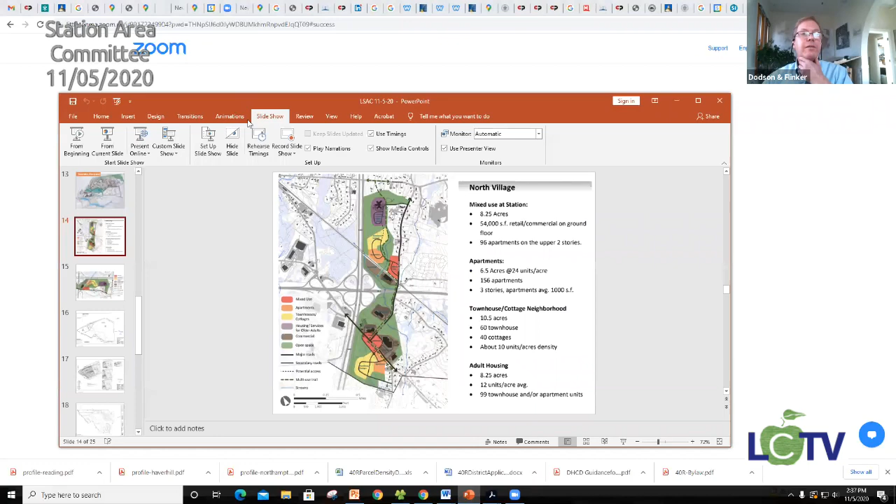Right. We haven't scoped it all out in that much detail, but I'll talk about it in kind of an outline. So I'm going to share my screen and turn on this PowerPoint. Can you all see that? Yep.

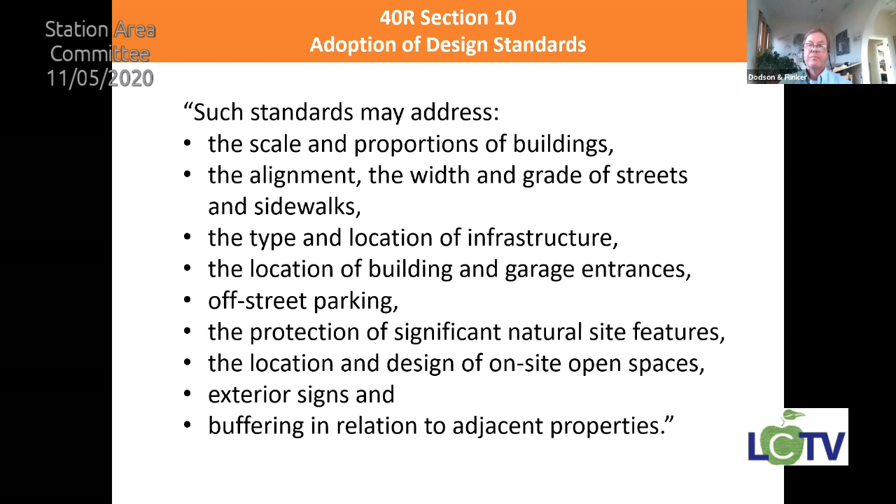So this will be an interesting test when we get the design guidelines written up as to what's the character that we're after. Because as we discussed earlier during the master plan process, there's kind of an essential conflict between what developers can afford to build and what the market will support, and certainly the colonial or historic tradition of towns like Littleton, right? You didn't traditionally have a 60 by 150-foot apartment building or a 300-foot long apartment building.

But that's the kind of development which a developer is probably going to need to put in to make this economically viable. So the question is, how do you make that something that has the character of Littleton or other towns in the region? Is it enough to just put a colonial facade on a 300-foot long building? Do we need to make that building look like 20 smaller buildings by breaking up the facade? So that's a lot of what we'll be, I think, wrestling with.

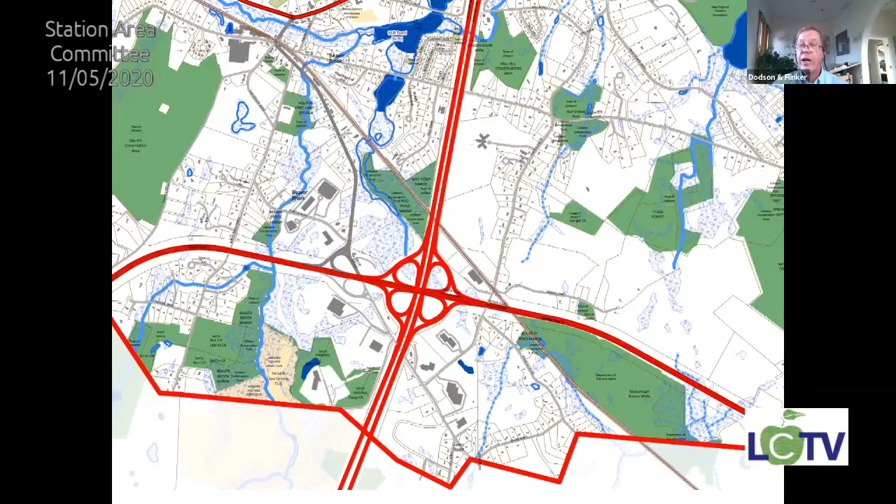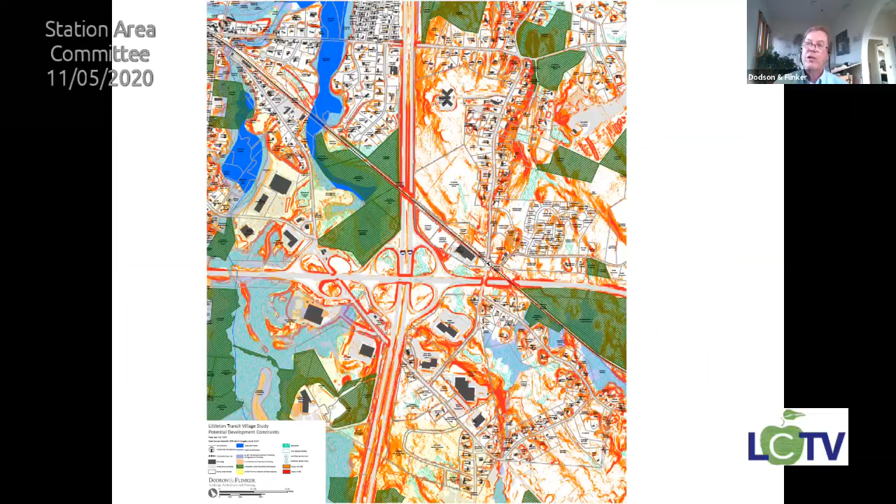So here's our site. I wanted to sort of back up, partly for my own reasons, and look at where we ended up with the previous master plan. As you know, we were looking at a site that extended all the way down to Taylor Street. Right now we're focusing on the areas north of the train station. As you recall, we discovered there are quite a few constraints between the arrangement of streets and the awkward intersection of the highways and the train and Foster Street and the sloping site and the steep slopes, all of which sort of led to this.

Now, this was a quick sketch plan that we did to illustrate the way different uses could be combined on the site to try to create more of a walkable village feeling. So as you recall, we have mixed-use buildings near the train station, trying to preserve and extend as much of the parking as we can for commuters, and then a road which crosses the wetland, and then the densest parts of the development closest to the station.

So we had a collection of apartments, and then the road continuing through and becoming a little less dense with cottages and townhouses, continuing over to townhouses by the Nashoba Life Care facility, and then connecting to their entrance road to create a second means of access.

So this plan was done quickly, but one reason to do this plan is to put some of those design goals in place. And even though it's pretty sketchy, it does illustrate a lot of the things which we'd want to see in the project.

So if we have new mixed-use commercial buildings, we'd want to have those as close as possible, or at least on the street side with the parking behind them, right near the train station. So you've got a sense of arriving at a real sort of village center. Instead of looking at a giant parking lot, you're looking at interesting buildings, you're seeing what's going on. It's more inviting, it's more attractive, and the parking is screened in the back.

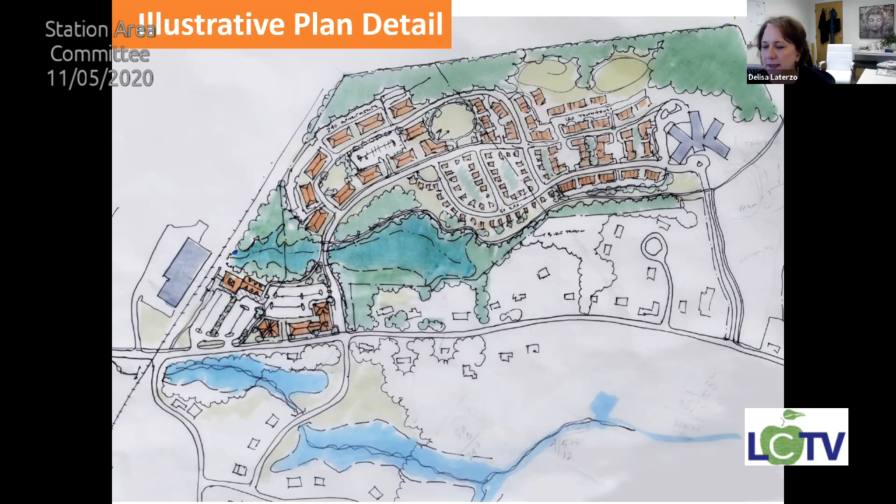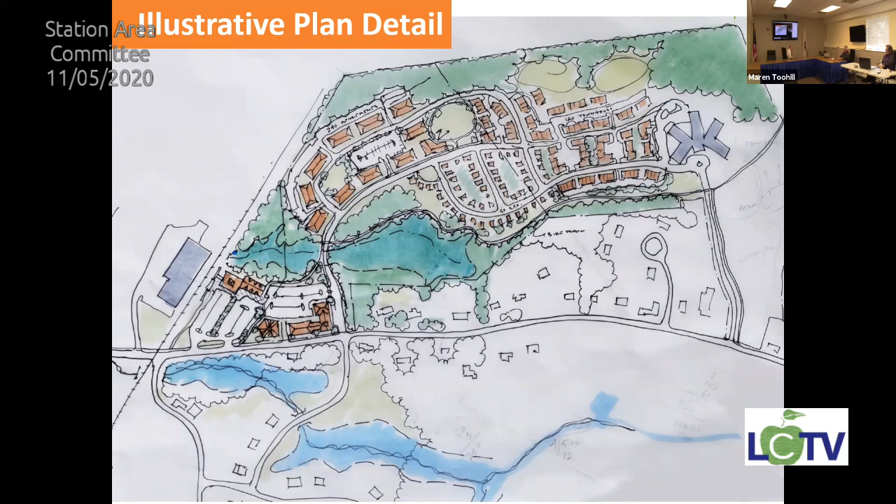Right. So that's still the approach we're taking, which brings up, I see that Joe Layton has joined us. Have we heard anything back from the Life Care Center? No, we haven't. So that's one of the things we still need to make sure of, that there's that corporate connection, to see their willingness to play ball. I think one of the things is what they're looking to maintain on the property, and then what they may view as in their interest to develop on their property. I'm just looking at the plan that's on the screen.

Right, but I guess, Joe, have you followed up with them again? Yes, that's one of the fun things with corporate, at least in my experience: you get to the person, you leave a message, and then you end up calling them back again. Yep, we got your message. And I need to try to get an actual mailing address to send some sort of more formal letter.

I'm sorry to keep interrupting here, but you had been given the name of somebody. So has a call been made to that person? I'm sorry, can you repeat that? She's asking if you have called the person. Correct. Yes. I just haven't gotten a call back. Okay, but have you called that person again? I've called them twice. Okay. So your thought is next to send a letter?

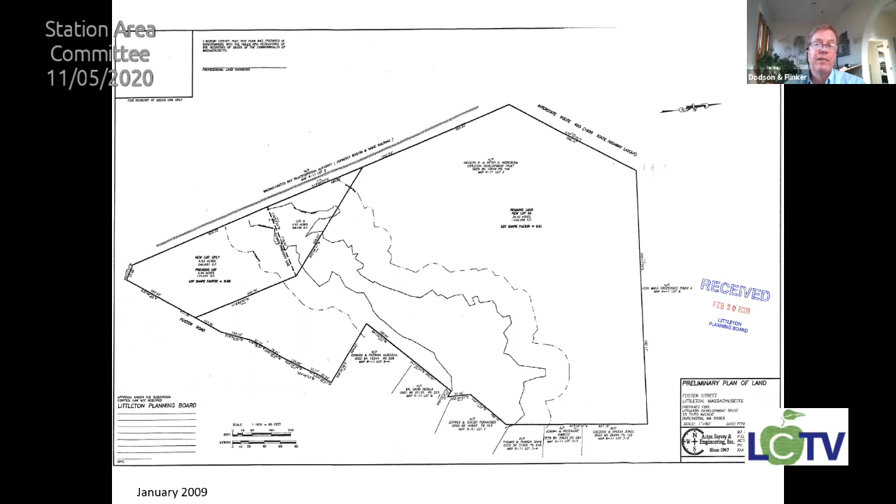Well, actually, some of the development proposals that the previous owner and the current owner came through actually show something pretty similar, so we can look at those. This was the base survey of the property from 2009. And it shows the wetlands that were surveyed at that point. So we're crossing diagonally across the site. And that dashed line is the wetland, I guess the 100-foot setback. Yeah.

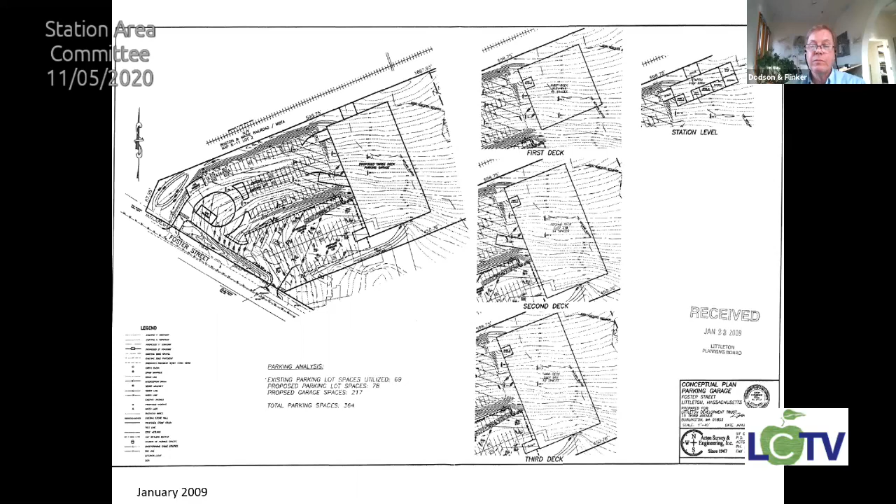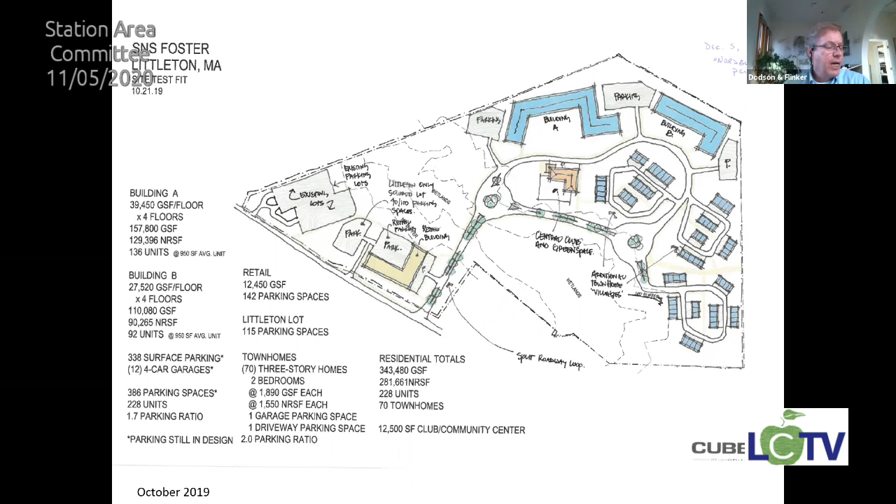There's a lot of senior communities that have one-story attached units, which could be townhouse style like this, where you have 3 or 4 or 5 linked together, sharing walls, or they could be pairs or triples with some shared walls. Typically, a lot of seniors like the 2 levels anyway, as long as they have a bedroom on the ground floor, and then use the upstairs for guest space or office space. Okay, maybe that's just my older thought process about what a townhouse used to be.

Yeah, it does typically. I mean, the point of it is to make efficient use of the footprint, so typically they do go up at least 2 stories, but there's lots of different designs. Okay, thank you. Yeah, because we still want single family or single units, single level. If the seniors want to downsize, they don't want to go into an apartment, they want to still have their own house, so we want to still have the flexibility to have something.

Some of the ones I've seen, the end units are single story and the middle ones have 2 stories, just to kind of break up the massing a little bit that way. Just a thought. This is obviously the detail we're going to get into more as we get closer to spring town meeting. Right. I mean, it's tricky because what you're presenting to the town meeting is some version of this plan.

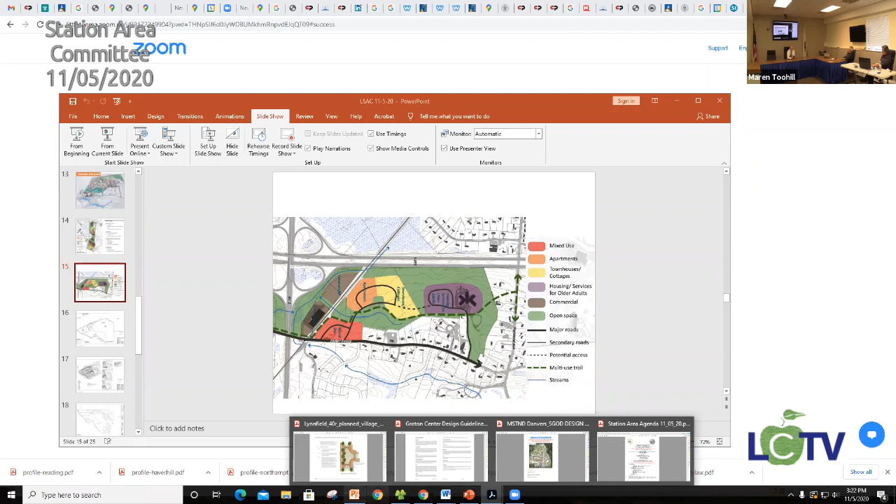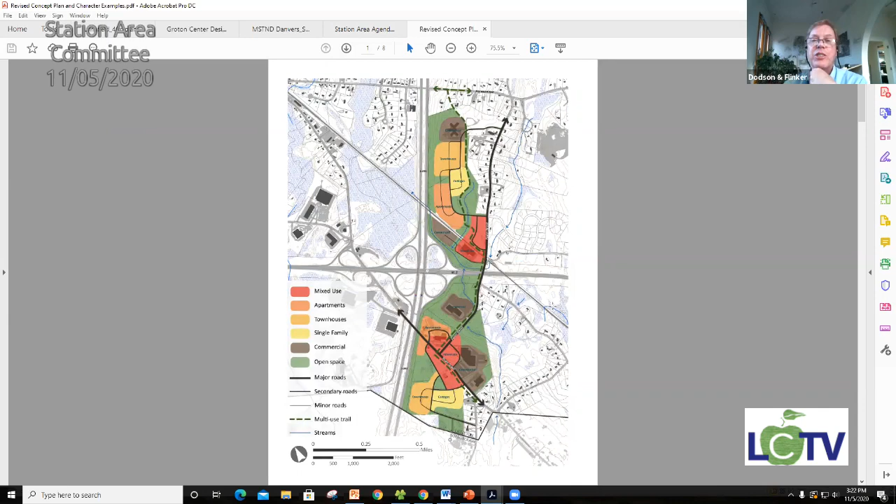Now I showed you, I think, was it a year ago? I sent some case studies or some examples. Let me just see if I can pull those up. Here it is. I sent you this plan, which was the revised plan. And no, I guess this was the original. Right. This was the original. This was the revised plan we've been talking about. And then these were some different character examples. Do you remember seeing this? I can send it to you again.

But this was sort of the answer to the question of what did people say that they wanted from the master plan workshops, and what do we think is the right fit for this? So this was an attempt to start that. Yeah, I think this is all in Judi Barrett's report. Right. Peter, I think you drew several of those out also in your slide deck, if I remember. Right. I think I started them with the slides and then put together this thing.

So these are mixed-use buildings, which we think are probably appropriate, buildable, and desirable in terms of what we heard in the town. I think this one from Red Brook Village in Plymouth was the highest rated in the visual preference surveys. Obviously, people like something that looks like a 200-year-old building. Probably not entirely realistic from a development standpoint, unless you're doing a master plan community like Red Brook Village, perhaps.

I think some of these others, like this Capitol Square project in Providence, are probably more buildable from a development perspective. It's a very nicely detailed building, but still pretty simple in terms of the basic structure. It is a big box, right? With a lot of articulation in the roof line. And that means it's affordable to build. But some of the design intent that we would maybe want to put into the design guidelines are having a lot of transparent glass on the ground floor so you can look in and look out, having a nice pedestrian relationship between the building and the street, creating a nice pedestrian space with a lot of trees.

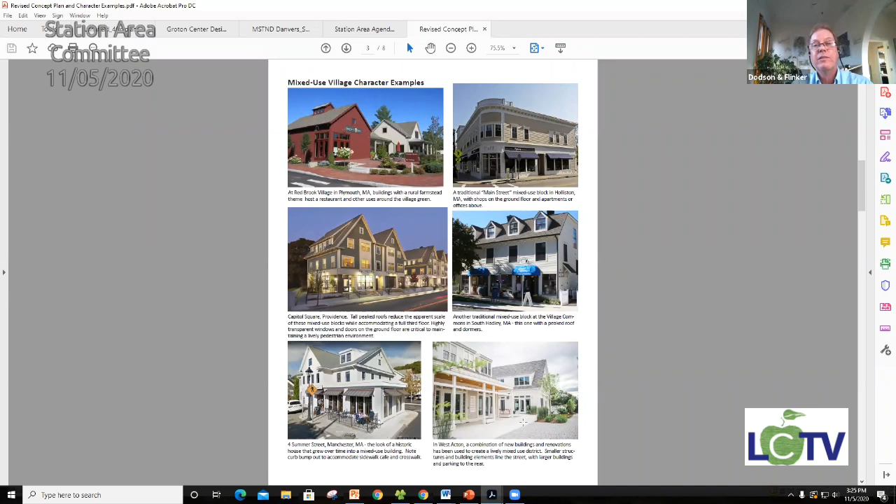This is another one down below, the Manchester example. They actually designed it to look like an old house that had been added on to, with the little awnings, the traditional windows, traditional trim, and so on. West Acton, which you may have visited, they put smaller, more articulated buildings up along the street and have a larger mass of a building behind with the parking set down the hill, and so on. Let's skip over this.

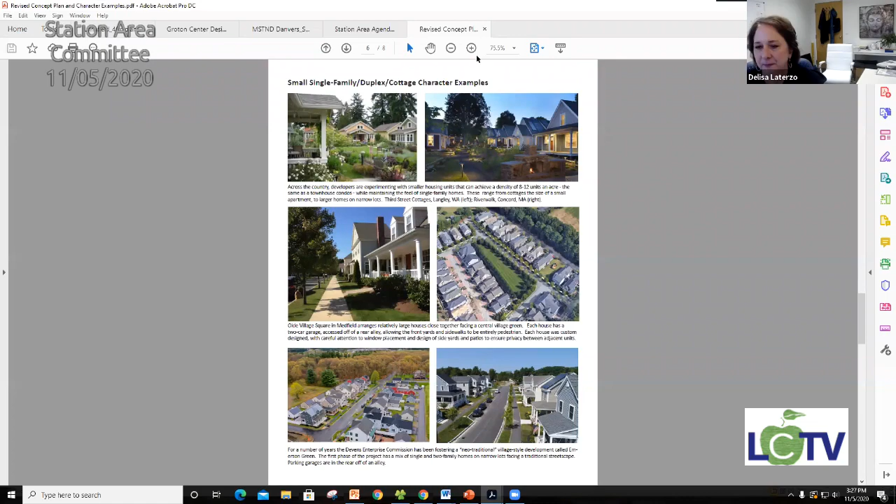See, I think like those, Mark, that's what I consider like cottages. I probably wouldn't even call them workforce because again, I think that these kinds of cottages would appeal to more the senior 55 plus as well as younger families. And I think if we call it workforce housing, then it almost eliminates that senior element. See a little bigger here.

Yeah, so the cottages are extremely popular. They sell really well. You do typically have, they appeal to people who don't mind walking from the parking lot to their house. But there's also been a lot of hybrids done where you have the parking behind the building like you might in a townhouse, but it's still a small cottage house kind of style.

Now, this one in Medfield, this Olde Village Square, which is quite a nice project with beautiful streetscape and a shared town green. But these are good sized houses. They're just quite close together. And the reason this works is if you look at this plan, there's an alley behind the buildings with parking in the back. So everybody has an attached garage like a traditional house, but instead of it being in front along the street, it's in the back on the alley.

And it's kind of like that new development at Devens. Well, it's not that new now. It's probably a couple years old. I can't remember what it's called, but they're set up just like that. There it is. Oh, yeah, that's it. Yeah. So in this case, they have almost a shared driveway behind the buildings with the garages in the back. But again, the key design element of this is what you get on the right.

So it's a really nice streetscape, a little bit of on-street parking, a lot of trees, nice sidewalks, but no interruptions with cars parked in people's driveways, the driveways themselves. So you have much more green space. It's much more attractive. And if you like that sort of thing, you like it. Which I do. So you could see in both of these pictures the goal of this. Yeah, and Emerson Green is sold out too. So they sell well.

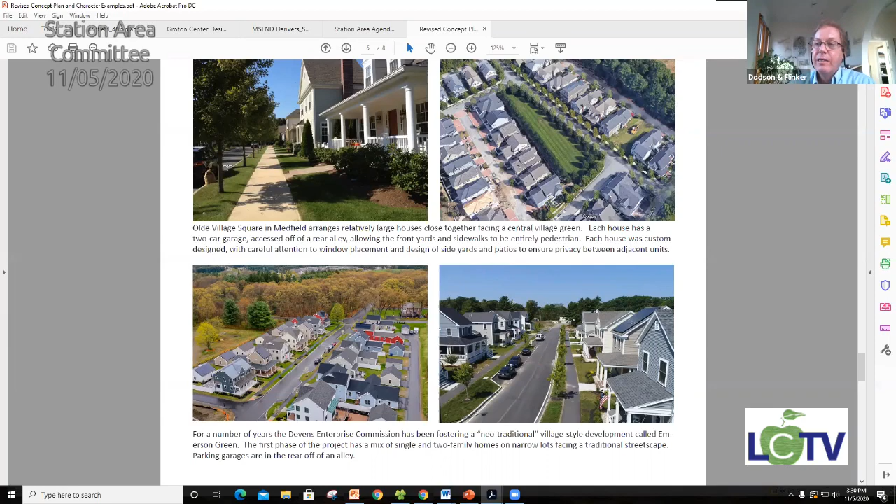Because you're getting a pretty high density, these are probably at least 8 to 10 units an acre. You're spending less on development costs. You don't have to pay so much for the land per unit. And you're saving on road length, utilities, and all the rest. And that's what makes these work well, as opposed to having to buy what's a building lot in Littleton now? 1,000...

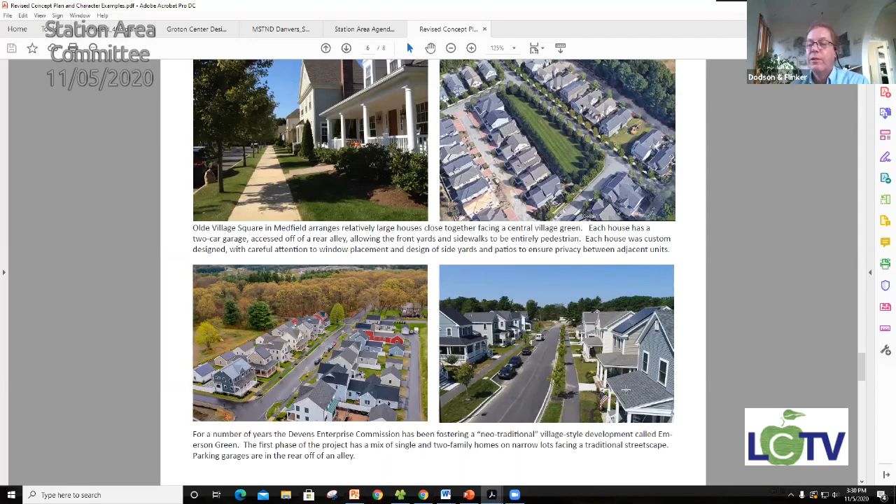Easily. It adds up. So all of these ideas we can incorporate very easily in the design guidelines in terms of this goal for a beautiful streetscape, and then specific standards for how many trees, how big a sidewalk, relationship between the buildings and the road, provision for porches, and so on.

And then here's some apartments. So these are kind of typical, somewhat mid-level in terms of price apartments. But basically, you get what you pay for in terms of apartments. Like the one on the lower right is probably more affordable, more buildable for a developer, probably in a market like Littleton.

But it also incorporates a lot of design features which we could bring into the design guidelines, like articulating, they call it articulating the building by separating it with these bump outs, separate colors, sort of dividing the facade. See how all of these make an attempt to lower the apparent mass of the building by breaking it up vertically and horizontally with bands of color, different kinds of materials.

And then there's some simple things like traditional window proportions. So rather than having a big, ugly square window, you take two or three sort of traditional rectangular windows and put them closer together. And it just looks more, well, it is more of traditional design. And so it looks more like it fits. And of course, articulation of the roof line.

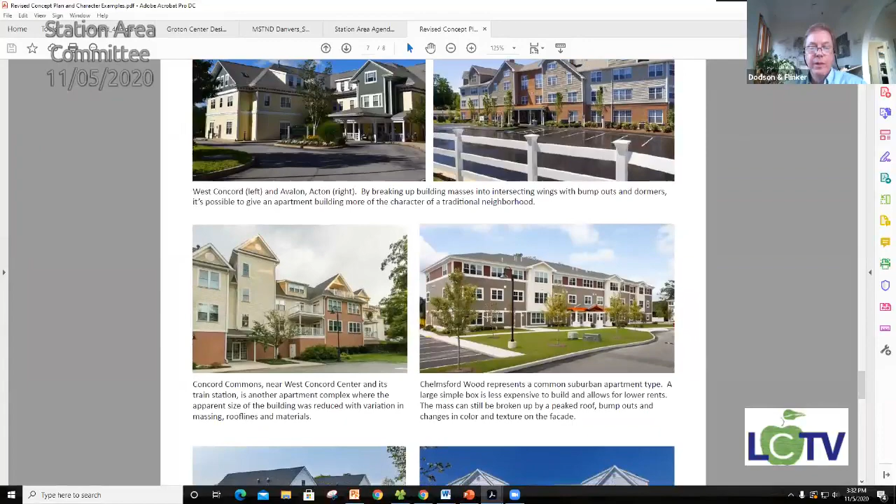What else do I have here? Oh, here's some other ones. So you see this student housing in Middlebury, which is essentially apartments, but they broke it up into two units, both of which have more or less the proportions of traditional buildings, even though they're quite large, rather than being a single monolithic slab, right? So breaking up the mass into units of smaller sizes.

The lower right, again, breaking up the mass vertically and horizontally with bump outs. And then within the building, the builder is basically framing this out as a bunch of cubes, but then sort of integrating roof elements that break it up and make it feel more like a traditional building.

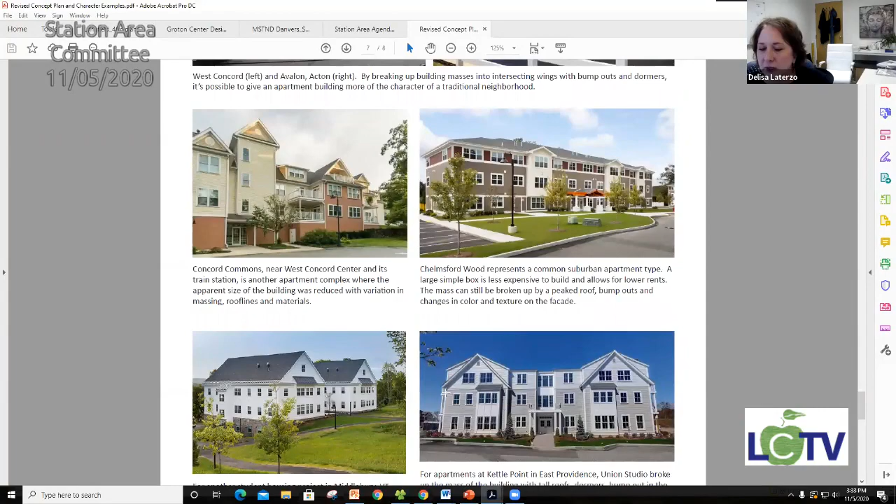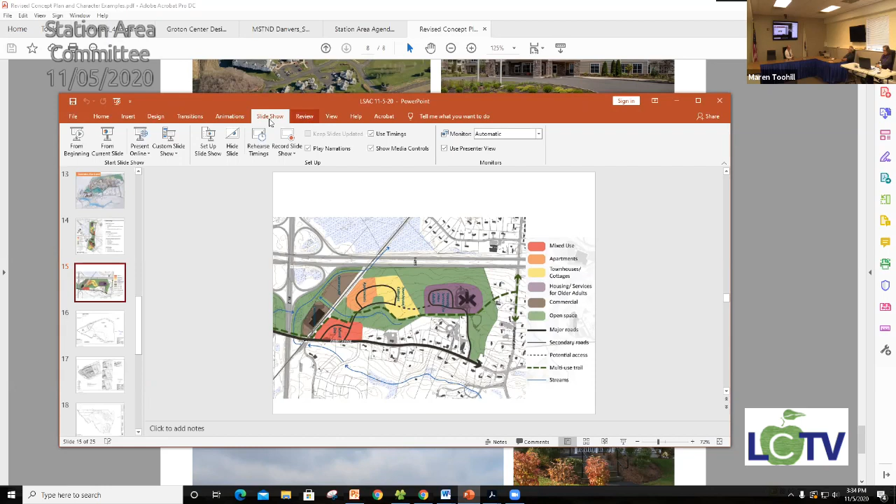Sorry, I think these are some really great examples. I think we should keep moving on because it is 3:30 and we need to be finished by 4. Does anybody have any questions about any of these styles Peter has presented? I just think we'll probably suss it out more as we get further down in the process and we come up with densities and look and feel.

Right. Well, so the question for you again is, we need to, for the zoning map, identify the areas that we want different uses to be in. Well, I guess one question is, do you just draw a border around that entire parcel and say that's the 40R district, and say within that, we're going to give you the flexibility to design something according to your own needs, Mr. Developer, Mrs. Developer. But we want you to follow these guidelines.

Or do you say there's an overall district, and then within that district, we want to have sub-districts and say you have to build mixed-use buildings near the train station, you have to build apartments in this area, you have to build townhouses, cottages in another area, and so on.

The problem with leaving it all to them is supposing we rezone this, we do the 40R, they come in and start with the apartments and then stop. Then we got apartments, and that's not the only thing we really wanted here. We wanted a mix. So I think we have to make sure that we're going to get a mix as we move forward.

Yeah, I agree. If I recall the discussion, the town was interested in having apartments downslope on the site. Oh, yeah, definitely. So that definitely would be a sub-district. And I can't imagine, for example, on the Life Care Center, having apartments up near the driveway there. Right. As an absurd example.

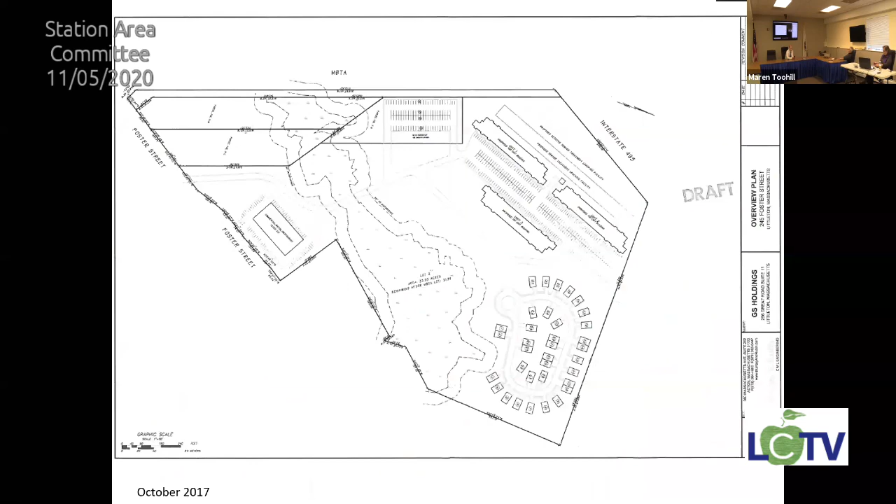Yeah, so I guess the question, we didn't really conclude with these. Would you be comfortable with this kind of development? I like that one. I'm not thrilled about it all being townhouses, maybe some single families, but it does what we were talking about, putting the apartments way in the back where you're going to see them from the highway, but not from the street. And then a mix of other housing along with it. And I like the amenity center in the middle of it of some sort, whether it's senior housing or whatever. I think the retail down front, I know we all talked about it, we all want it, and I have no problem with leaving it there.

That's going to be a function of what actually works down there, what makes sense to put in down there. I don't think you're going to get a lot of it down there. Maybe a little convenience store, coffee shop. But that's something the market will determine too. Exactly, that's what I was trying to get at. The market will decide what goes in down there. Right. I'm fine with the one that we have up here, but I would like to see some cottages in there, but maybe the cottages would be closer over towards the Life Care Center, right?

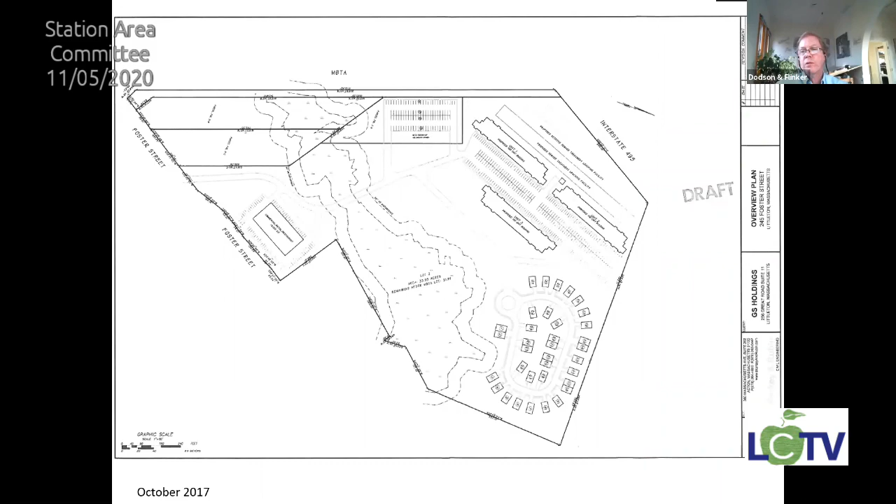Right. Go back to the other one, Peter, the first one that was more conceptual. This one? No, keep going back some more. That one, yeah. So if we've got the apartments and then townhouses, could we have an area where we had more cottages, which then could be used either for workforce or for 55 plus? Wouldn't we want to keep that away from the senior center? If we're going to partner up with the senior center, we're going to want independent or assisted living close to there, something of a bigger mass to go along with what they already have there, and then the housing and stuff further away from them.

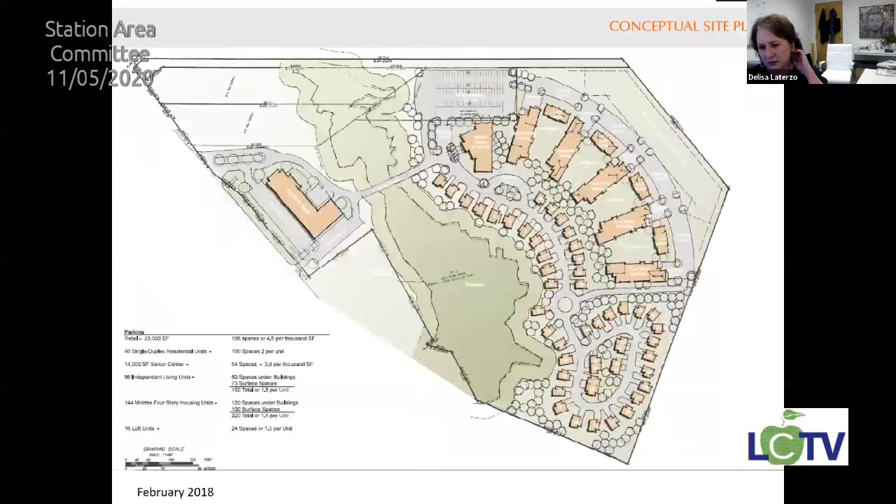Yeah, so Peter, we've looked at this, now go to the one you just had up, keep going. Yeah, this one. So where here could the cottages be located? Would you just take away some of those townhomes? Yeah, any one of those circles could easily be cottages. The cottages and townhouses are basically the same density. Those would fit into the 12 units per acre. 40R does have another category of 8 units per acre for single family homes.

So Delisa, you've got to remember too, this is missing a piece of land. This is missing the property that's owned by Life Care. So that's why the dotted line's right there. There should be another piece off to the other side of it. Right. Correct. But this was done just by the owner of this property. Right, that's what I mean. Yeah.

So maybe we can do something, if they do decide they want it, and I can't speak for them, but I think they'd be crazy if they didn't want to put something else in there, like independent living of some sort. Right. Higher density, smaller buildings to attach to what they have, so you can have assisted, independent, so aging in place is what we've been trying to get all along, so.

So what you're saying, Mark, is that you don't think we should have, let's say down in the lower right corner, have those be cottages? No, I agree they should be cottages. I'm just saying if we're going to do cottages with independent living, I'm talking about if we want to do something that has a little higher scale and higher density and is more for older seniors, I guess that's the correct way to put it. Right. We put it on the other side of that dotted line, closer to the life center. Yes, I agree.

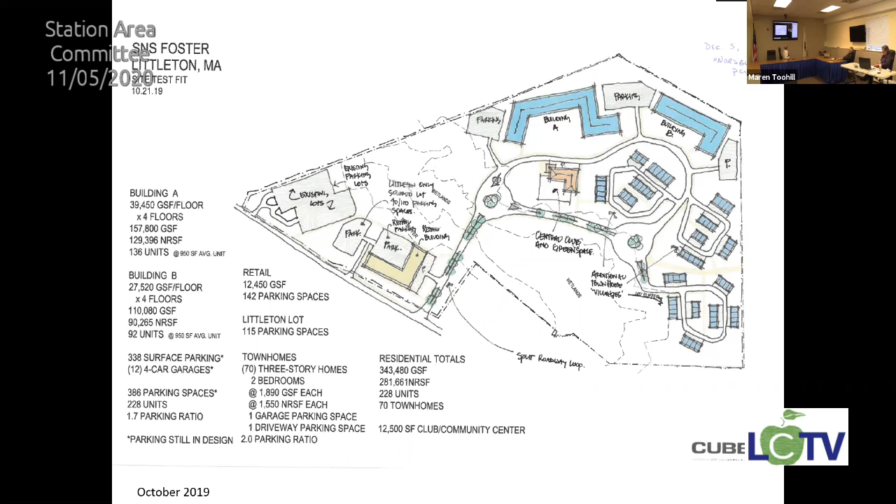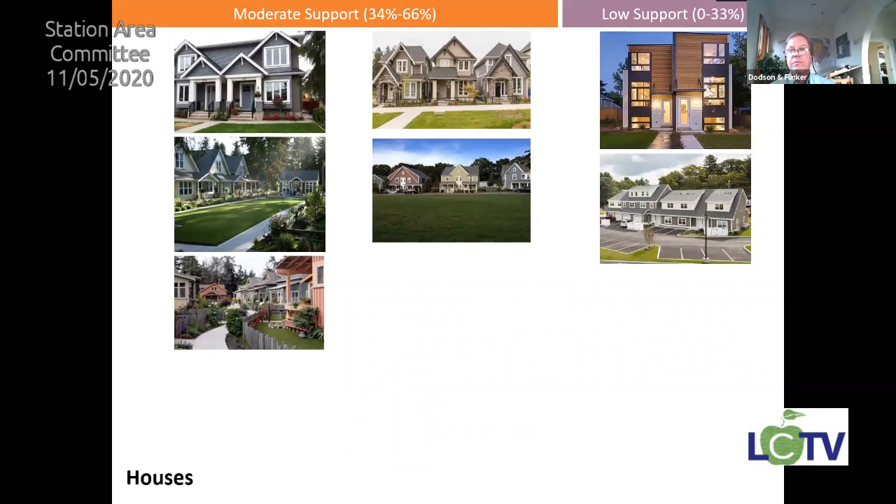Does that help you, Peter? What other information do you need from us for our next steps? I guess what we want to do next is actually get into the outline of the design guidelines themselves. The interesting part about this process is that we're really jumping right into the design guidelines and the zoning. It's not part of our scope to redo a master plan for the property.

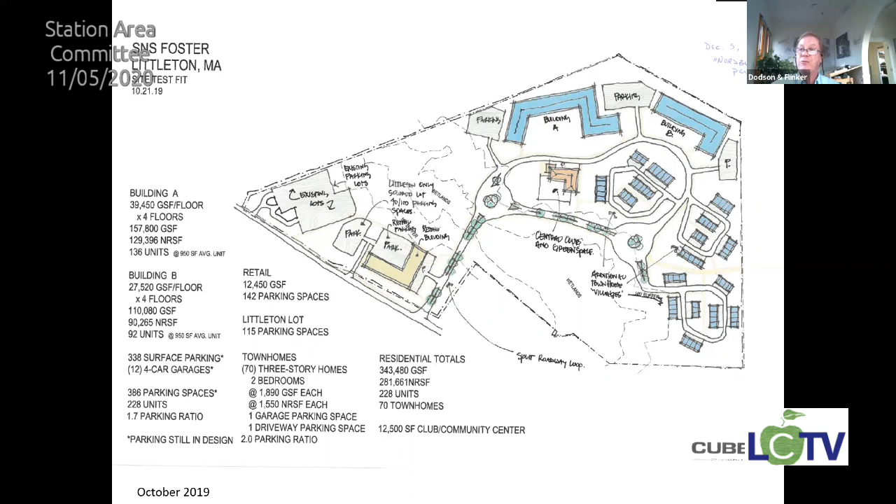Right? So, I'd love to sit down and redesign this whole thing for both properties and show how it could work in detail like this, but that's not part of our scope. So essentially, we're going to have to identify general areas and densities, and the design guidelines will then apply to each of those areas. And then we'll try to get it so that it produces the results that we like. And I think that's why we need to see one that's already been done, so we get a better feel for what we're talking about.

Maybe a couple of them, if you can get us examples for the next meeting of the density and the bylaw and the guidelines, then it would be easier for us to wrap our heads around it. Okay. Peter, you and I talked about this, but to me, one of the benefits we have at these two properties, at least for 245 Foster Street, is we have a very interested property owner who I'm sure will be able to provide input, if not only feedback.

Right. Now, from what I understand, a number of towns have actually worked directly with property owners or developers who have produced a master plan that becomes essentially the plan for the site. So if they're willing to invest the money before the zoning changes, that's another nice thing to do, because then people can vote on something where they know what they're going to get. That might be a point too.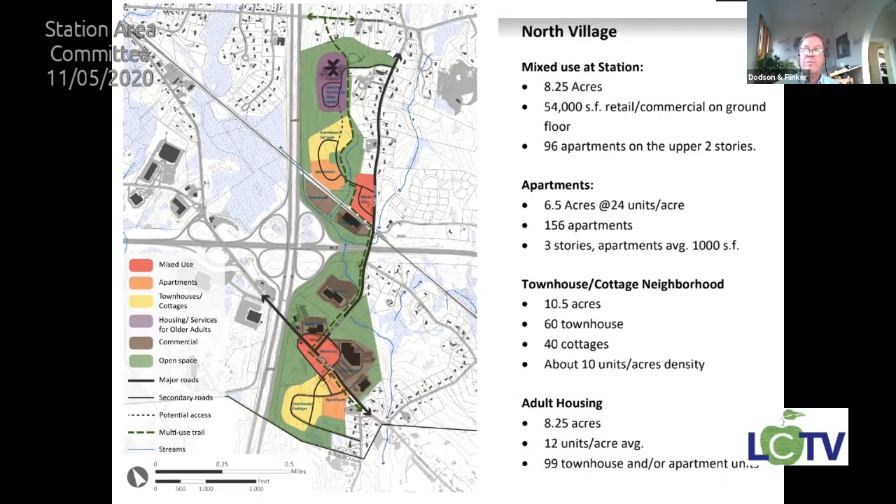And so these going forward are going to be key decisions. So meanwhile, we can continue with the design guidelines, but keep in mind that what the town is going to vote on is a very specific zoning plan that could be something like this, or like this in terms of scope. Right. I think we're in agreement on that. So, Maren or Peter, do you have the design guidelines or form-based code just as a reference?

Oh, from the Littleton Common? Yeah. Yes, I've seen those. Okay. So that's a question. I guess we'll get into that at the next meeting, as to how detailed the design guidelines should be themselves, whether or not you want to incorporate some of those form-based code elements, or whether that seems to be going too far.

I think just quickly, the issue with that level of detail is that you need to agree on the design in a lot more specificity, as they did when they went through that process. So they did diagrams and plans that showed exactly where the buildings would go and how big they would be. Yeah, so Lisa, if I recall the discussion when we were starting this, we weren't looking for form-based code for this area. That would be too prescriptive. No, I totally agree. I just thought it would be a good reference guide, just conceptually.

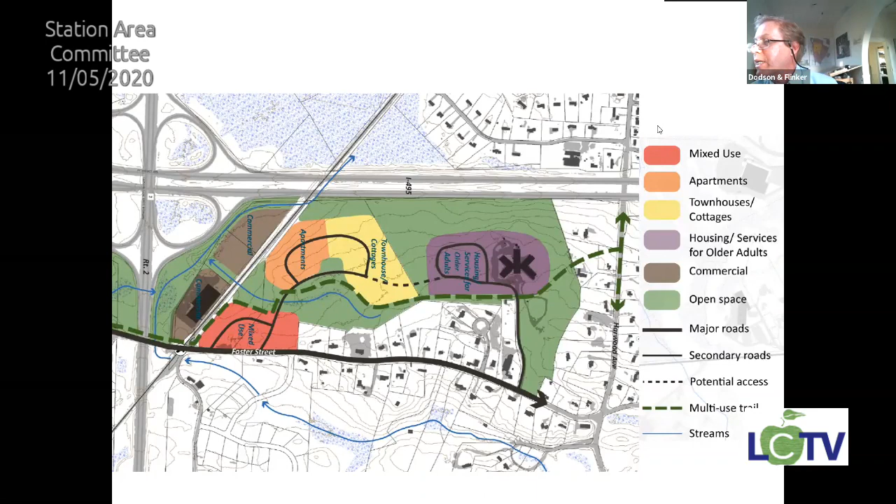Okay, so anything else, or should we go ahead and set a time and date for our next meeting? Do you have what you need? I do. I would like to hear from Joe, either now or later. Joe's napping. Okay, let's look at calendars then. When are you thinking, Peter, you'd be ready to meet again? Probably the last week in November, first week in December is pretty open. It's Thanksgiving, or the one that starts on the 30th. The week after Thanksgiving, so the first, second, or third of December.

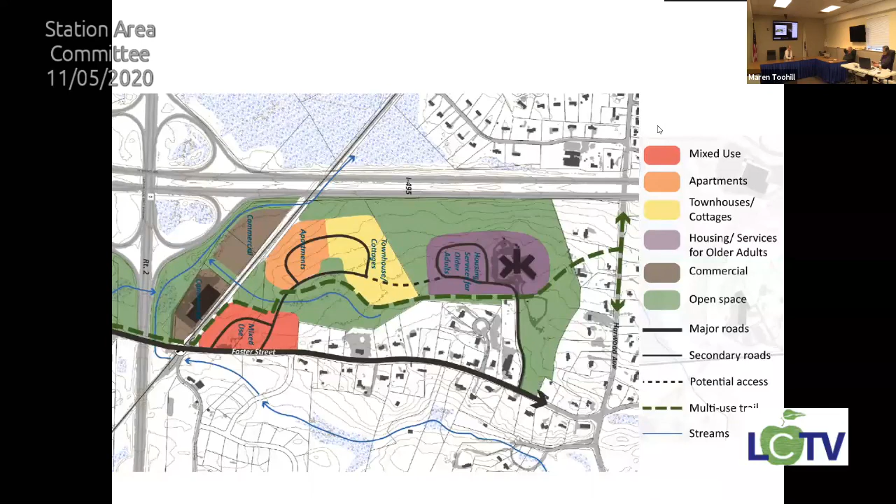Mark, what do you think? Does that work? Yeah, if it's COVID, I'm not traveling anywhere, so I'm around. Okay. I'm not taking up skiing, that's for sure.

Okay, so any days that don't work for people? I'm pretty open that week. I can't do Wednesday. Okay. Wednesday is the second. Matthew said he can't do Wednesday. Right, December 3rd, Thursday is the planning board meeting that evening, but I didn't know if we're open to daytime again or not. I am. Sure. I can be if I have to. Reluctantly. You want to do 2:30 again? Sure. Matthew, does that work? Yeah, that's fine. Okay. So we're going to say 2:30 on Thursday, December 3rd. We're in December already. And Maren, you'll send out a Zoom?

Mhm. Okay, wonderful. I would recommend we have a discussion offline about whether we should be all Zoom or partial Zoom. The setup is a little much for just a few of us gathering in one spot. It takes a while for setup. We have to get the extra camera and all that. But would you rather do the whole thing remote? If we could do all of it remote, it would be a little easier on us, but if you think you have better input by being in the same room, just let us know. Yeah, it would be easier for me to do it full remote. It's easier during the day, because it's a work day and I can switch back and forth between calls. Plus, with COVID escalating, might as well try and be as safe as possible.